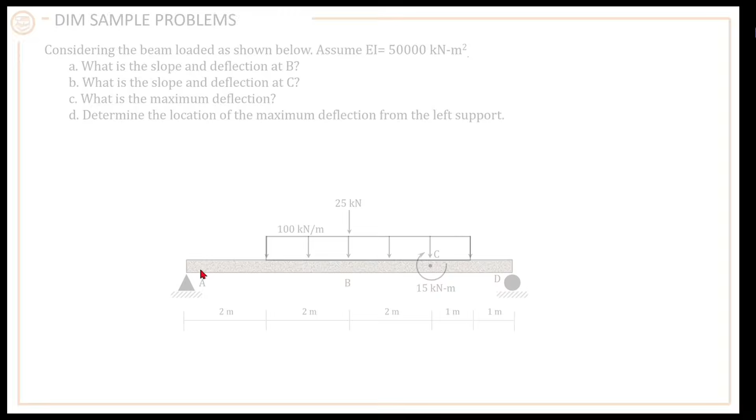Okay, so how do we solve this? Obviously, the first thing to do is we solve the reactions at the supports. Let's take a moment at point D to calculate the reaction at A.

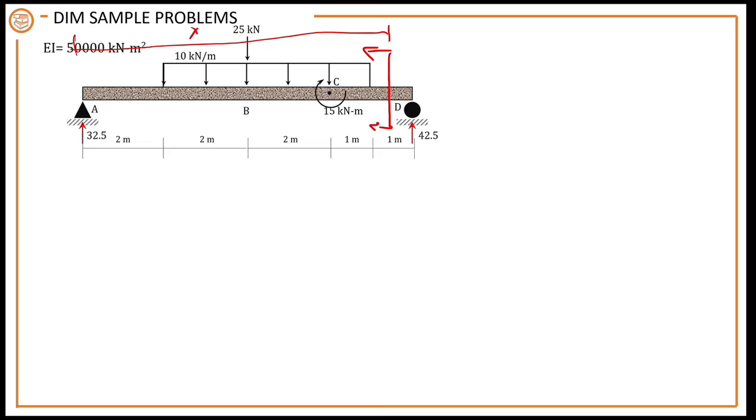However, in our theory of structures, our technique is different: we will create a single moment function, moment functions that will represent every segment. We have 5 segments here. How do you know you have 5 segments? Every time your load changes. So this is the first segment, second segment, before the load changes there's a concentrated load, then continuous load, then it changes again because of a concentrated moment, then changes again because of a cut, and then this is our last segment. So instead of having these 5 segments, we will just have one cutting section where we create the moment function, moment at that cutting section, and that cutting section is actually moving at a distance x from left to right, which will represent the moment function for all of the segments.

Ang 5 segment na nagbabago-bago yung moment diagram. Now, the problem here is your cutting section should act on the last segment and should also cut the uniform load. However, yung uniform load natin hanggang dito lang. So, what are we going to do is to extend this uniform load para masama siya sa cutting section. You always extend this up to your final segment.

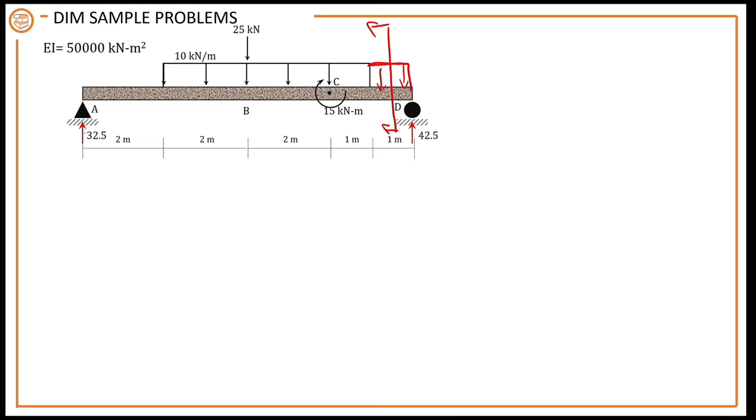Sir, paano yan? E di nagbago na yung ating reaction dahil nagdagdag ka ng load, magbabago yan, di ba? Pag nagdagdag ka ng load, ginagawa lang yan class sa mga varying loads. Let's say you have the triangular load, putol siya, so i-extend mo lang siya. Ganyan. Lalagyan natin siya ng extension lagi. Okay, katulad nito, uniform load, extend mo siya dito. Pero hindi na magiging pantay yung ating loadings, kasi nagdagdag ka eh. Hindi na siya same sa previous loading.

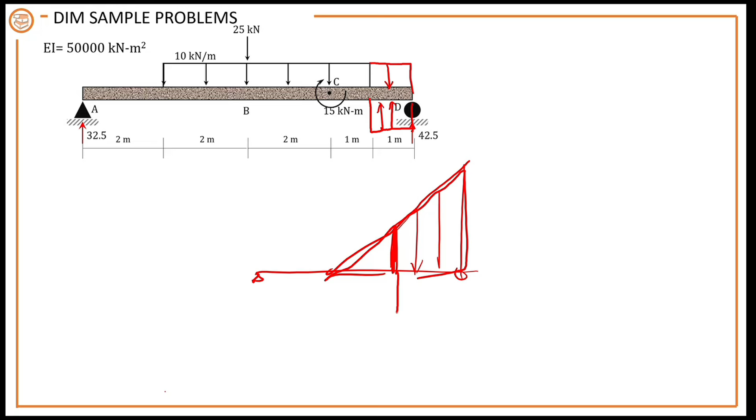So, ang gagawin mo is just to negate it by an upward uniform load. Kung triangular yan, kung ito yung dinagdag mo, magdagdag ka ng trapezoid dito. Just negate. Kung ano yung value neto, yun din yung magiging value neto, pero upward lang. Okay, so yun yung mangyayari dito, class.

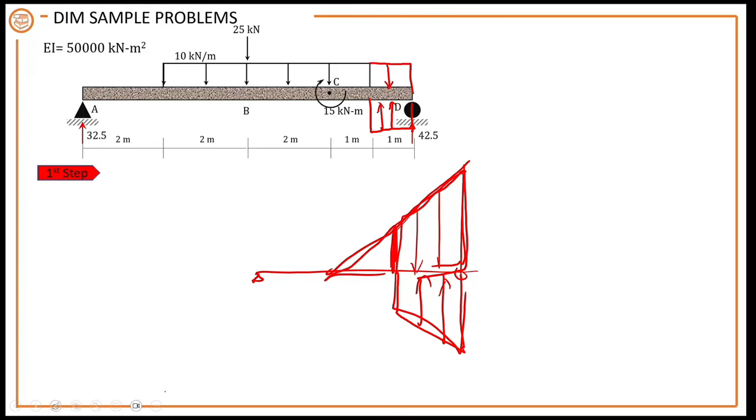So, bago ka mag-create ng moment function, for the cutting section, mula dito, a distance x yung ipoprovide natin, but you have to extend your uniform load. Meron ka ring upward dyan, para itong ating cutting section will represent any part ng cutting section. Pero wala na dito, wala nang uniform load yan, okay, dito lang sa dulo.

Okay, so dito tayo magmo-moment sa cutting section na yan, to establish the moment function, moment as a function of x. So, moment natin isa-isa yung mga loads natin. This is a distance x from the left support. Okay, so clockwise is positive yung ating gagamitin na sign convention for taking moment.

So, 32.5 times, again, that is a distance x, kasi this cutting section is moving. Nilagay lang muna natin siya sa dulo, pero moving yan, yung cutting section na yan. Okay, times distance x. And then, minus the uniform load. So, the uniform load, hanggang dito lang uniform load na yung moment natin.

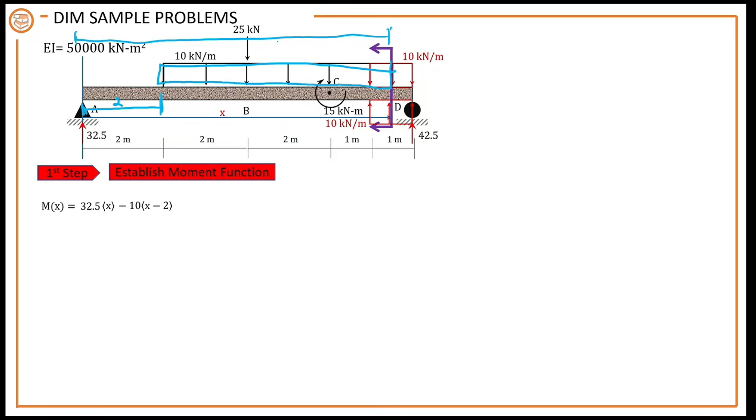Okay, ano ba ang distance ng uniform load na yan? Ano ba yung length niya? Kasi we need to get the resultant niyan. If this is x, bawasan mo lang ng length na to, that is 2 meters. So, taking moment, counterclockwise yan, papunta sa cutting section. So, that is 10 times x minus 2, kasi this is x, then bawasan mo ng 2, kaya ang length niya, x minus 2.

Resultant pa lang yan, class. We also need the distance. Okay, so ang distance niya, yan, punta sa cutting section, that is x minus 2 over 2.

Okay, so next, we now have the concentrated load, yung downward concentrated load. Ito pa, 25, counterclockwise papunta dito, so negative din yan, negative 25. How about its distance from the cutting section? Ano distance niya? This is x, bawasan mo lang ng 4.

X minus 4. Then we have the concentrated moment, so that is clockwise, plus 15 kilonewton meters. Pero, pag naglalagay tayo ng moment, alam natin na wala namang distance yan because that is already a moment. However, for this moment function, lalagyan natin siya ng distance. Ano distance niya papunta dito sa cutting section? This is x minus 6 meters, pero naka-raise to 0, para 0 lang din ito, class.

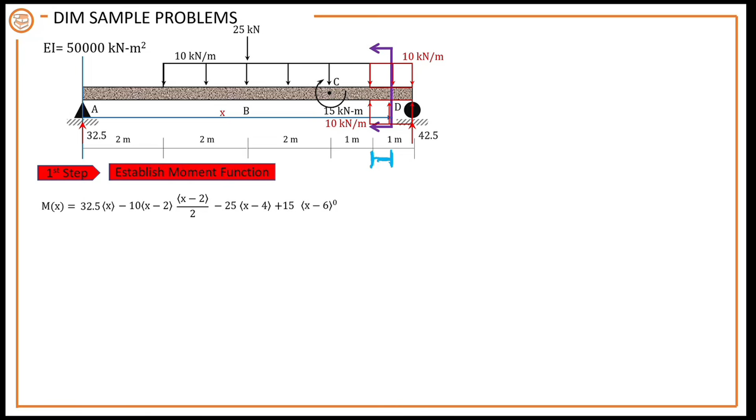So, clockwise moment. And then finally, do not forget ito, baka makalimutan nyo to, guys. Nagdagdag tayo dito ng upward, which will cause clockwise moment. At ang distance nyo lang, ano distance lang nito? Yung length ng load na yan. So, x minus, madali lang naman maghanap ng distance, ima-minus mo lang yung nadaanan niyang distance lagi. So, the distance is x minus 7.

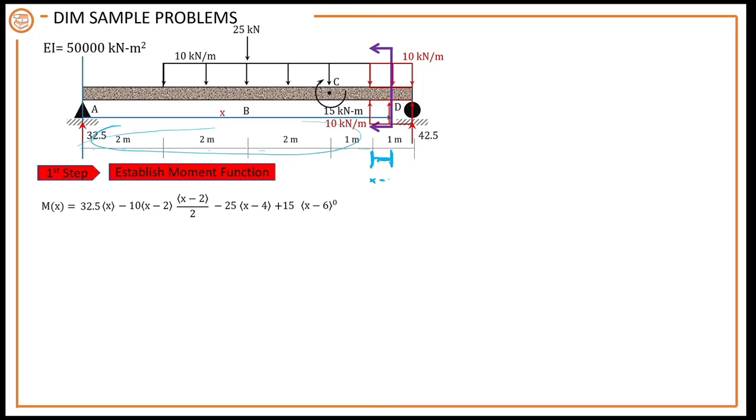Okay, so clockwise, uniform load, clockwise, kaya positive. Uniform load, resultant pa lang yan, and then the distance is x minus 7 over 2. Okay, simplify lang natin, class.

This is now your moment functions. So, ito na yung magre-represent ng moment at any section of your beam. Okay, halimbawa, you want to get the moment at this cutting section, moment at distance.

Find the moment. Determine the moment at a distance of 1 meter. Okay, you'll just use this equation. Moment at the distance 1 meter. Substitute the 1 here. So, let's simplify first.

Boundary conditions, guys. This was already discussed previously, mentioned as well. That's the boundary conditions, the slope and deflection at a given support.

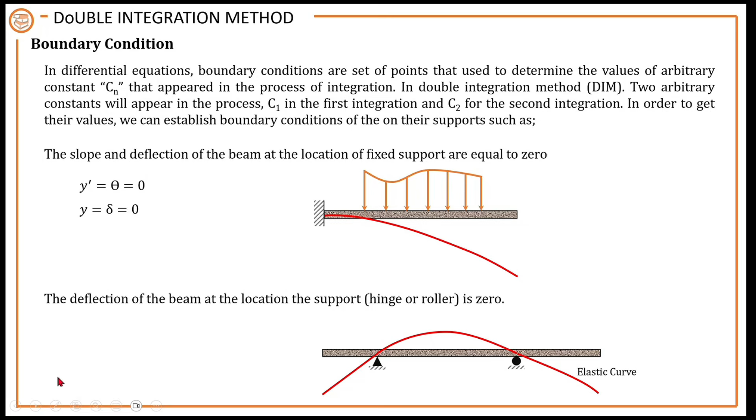For a fixed support, there is no deflection and no slope, both are zero. For rollers and hinges, there is no deflection, but there is slope, because the curve has a slope there, so the slope is not zero there. Okay, so that will be the boundary condition.

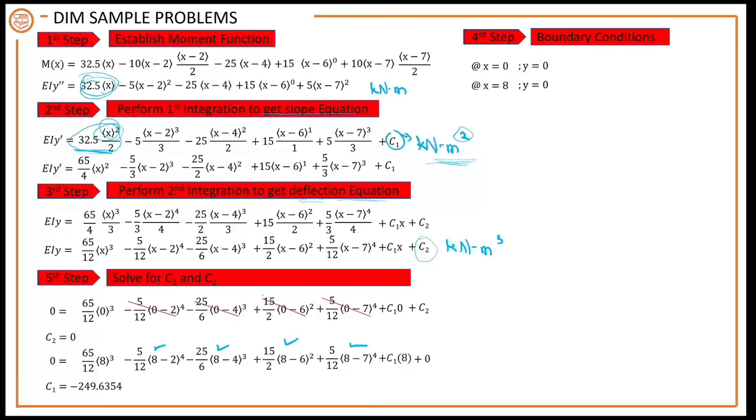Okay, we already have C1 and C2. Now we can put these into our slope equation and deflection equation.

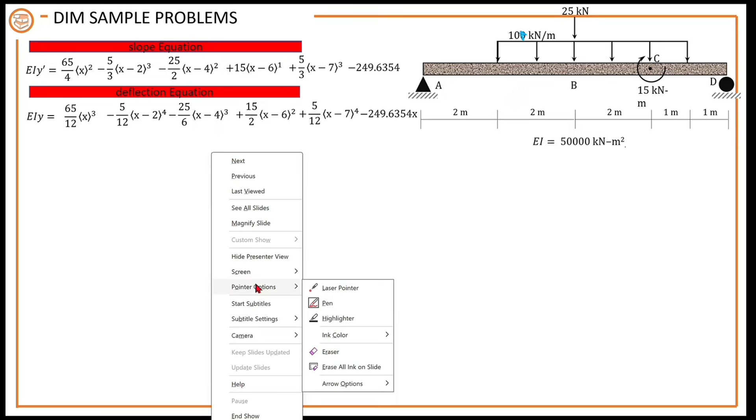Now, let's solve for letter A - we're looking for the slope at B, written as theta B or y prime B, and the deflection at B, which can be denoted as delta, lowercase delta, or y sub B. So B is at x equal to 4, right?

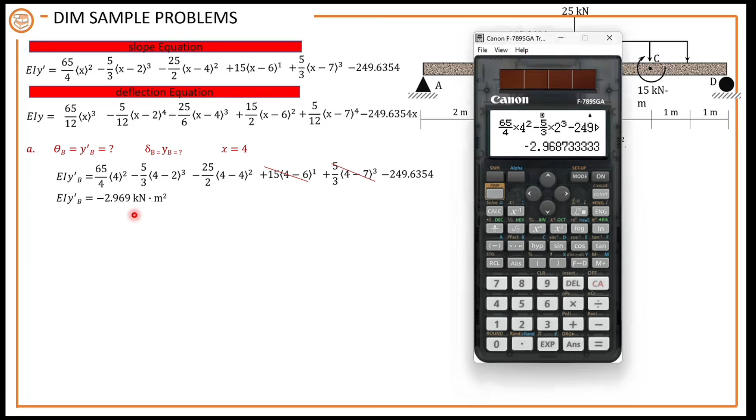Pero kasi, okay, may value tayo ng EI. EI natin is equal to 50,000 kilonewton square meter. Okay. Given yung EI. E is modulus of elasticity.

I is moment of inertia. Nung material natin, itong concrete beam, let's say this is a beam, kung ano man siyang materialis, kukunin mo yung modulus of elasticity niya, saan ba siya gawa? Pag steel, di ba, 200 gigapascal. Yung moment of inertia niya, ano ba cross-section niya? Solve the moment of inertia.

Okay, so, now, EIY prime B yan, kaya may EI pa. So, para eliminate yung unit nito, so divide natin by value ng EI. Ang unit ng EI is also kilonewton square meter. Bakit naging kilonewton square meter ang unit ng EI?

E, modulus of elasticity, gigapascal. Gawin na lang nating kilopascal, kilonewton per square meter. Unit ng E. Unit ng I, millimeter raised to 4. Gawin nating meter raised to 4. Diba? Cancel. Ano matitira? Squared. Diba? So, kilonewton square meter ang unit ng EI or flexural rigidity.

The higher the value of EI, the stronger the material is. No? Okay. Kaya maganda pinapataas lagi yung modulus of elasticity at yung kanyang moment of inertia. Pag malaki kasi yung value nitong EI, lumiliit yung slope. Ibig sabihin ng slope yung rotation, no? Paano siya nagro-rotate? Mas maliit yung rotation, mas maliit, mas maganda, no?

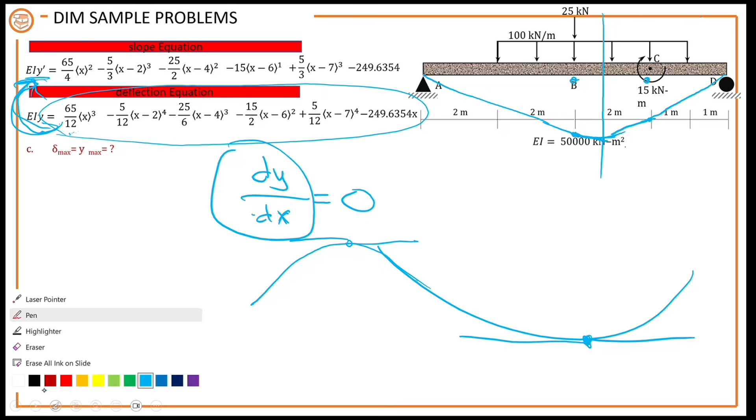Maxima minima sa differential calculus. Pag pinuha mo yung first derivative, babalik ka lang dito. Yung first derivative niya, ito yun. Balik ka dito, first derivative niya.

At kunin mo yung 0 na slope. At slope is equal to 0, makikita yung value ng x ng ating maximum deflection. So at maximum deflection, your y prime must be equal to 0. Your slope must be equal to 0.

Okay, so gawin natin, punta tayo dito sa slope equation. Okay, so 0 natin yung slope. And then, solve natin yung value ng x.

Now, question: can we use all the terms nitong slope equation? Gagamitin ba natin lahat ng terms? When solving the value of x, dapat ba natin gamitin lahat ng terms na ito? Hindi po, hindi natin pwedeng gamitin lahat ng terms, unless dito mo sinusolve yung maximum deflection.

You are expecting na nandito yung maximum deflection. Saan natin ina-expect mag-a-appear yung maximum deflection? Dito. So dapat yung x natin is greater than 4 but less than 6. Hindi siya pwedeng lumampas ng 6, o hindi siya lalampas dito sa point C. So ano yung mga pwedeng gamitin natin kung yung x natin ay hindi lalampas ng 6?

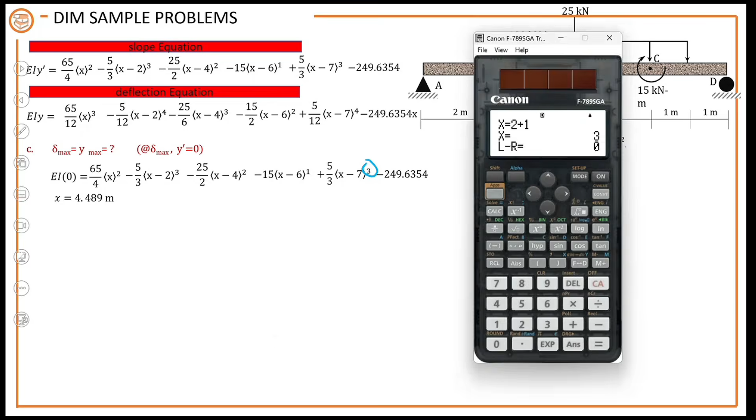Diba tatanungin ka lagi, what is the value of x? Ano ina-expect mo na value ng x? So syempre, para hindi mahirapan si calculator, ilapit mo lagi sa ina-expect mo na answer, para mabilis siya mag-calculate. So katulad dito, ano ba yung ina-expect mo na answer? Kasi possible maglabas yan ng negative na answer, sobrang laking answer.

So ilagay mo lang yung within the length of your beam. Within the length of the beam ang lalagay lang. Dito, dahil kinuha mo lahat yung terms, lahat ng terms ginamit mo, it will give you an incorrect answer. Okay, so ang gawin mo, i-resolve mo yung value ng x gamit ng tamang equation. Ang ginamit na lang natin, tinanggal natin to, tanggal din natin to, ito na lang.

Nagbabago-bago yung cross-section niya sa buong entire span ng ating beam. So for non-prismatic beam, how do we solve that? Since the elastic beam theory is derived with an assumption that the beam is homogeneous, or pare-parehas yung kanyang cross-section on the entire length, tawag natin prismatic.

Constant yung EI, and a beam with non-prismatic section must be cut at the point where the flexural rigidity changes. So kung saan nagbabago yung cross-section niya, kasi cross-section will affect the I, moment of inertia.

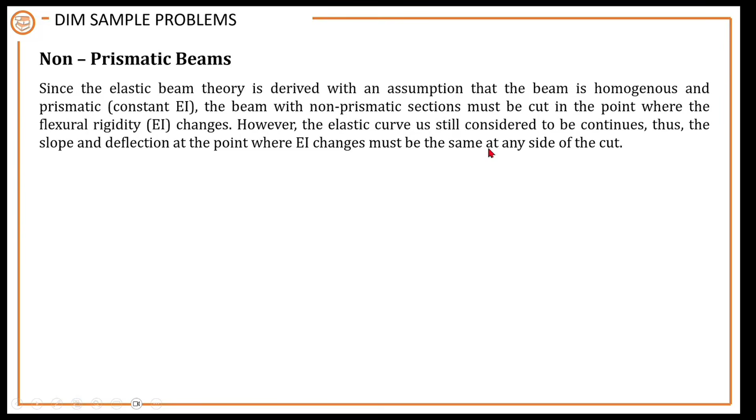Dapat ikakat natin yung beam doon kung saan magbabago yung moment of inertia. However, the elastic curve is still considered to be continuous. Thus, the slope and deflection at that point where EI changes must be the same at any side of the cut. Halimbawa, may EI1, kasi mas malaki yung cross-section dito, ito yung ating flexural rigidity 2. So, continuous pa rin yung elastic curve niya.

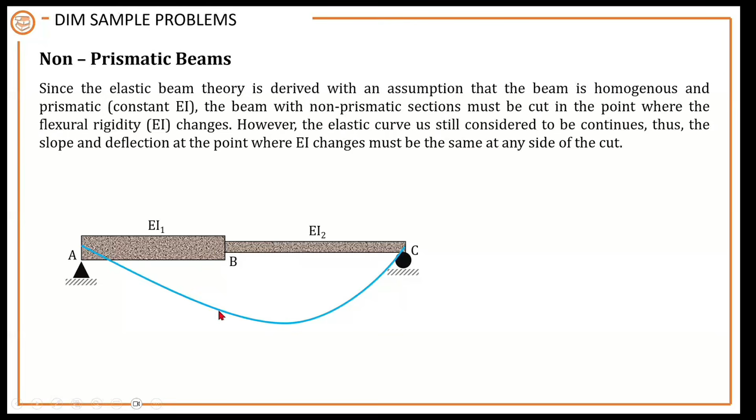However, pag gagawa tayo ng dalawa nang gagawin natin na moment function, isa para dito sa cutting section na to, at isa para sa ikakat natin na B to C. Dalawa yung moment function, dalawa yung slope equation, dalawa din yung ating deflection equation. However, at point B, parehas lang dapat kung ano yung deflection ng segment A to B, sa point B, same din ang deflection segment B to C.

So, ayan ang consider natin, theta B at YB. So, magkakaroon tayo ng additional na steps. Kanina, ito lang yung steps natin. Okay, ano-ano yung mga steps natin? So, number 1,

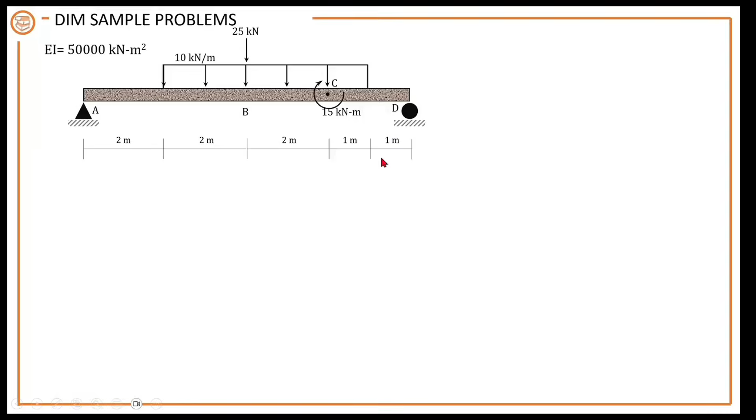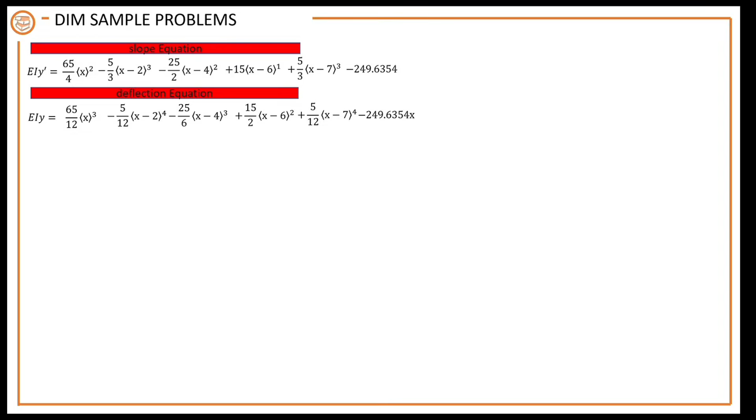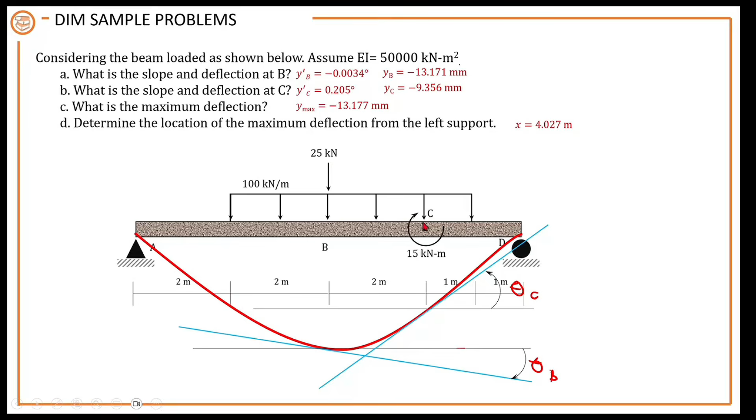However, for non-prismatic beam, magkakaroon tayo ng additional na step. Okay? So, ano yung additional step na yun? Ang additional step natin is actually the continuity equation.

For continuity equation, yung slope at B ng segment AB, kasi nga dalawa yung gagawin nating slope function, ay also equal to the slope at B for the slope function ng BC. Aside from that, yung deflection at B gamit ng equation ng AB is also equal to the deflection at B gamit ng equation ng BC. Kasi magkaiba nga yung equation ng AB tsaka BC. If we have

So, first thing to do is to solve the reaction sa supports. Hindi naman nakaka-affect yung EI, yung flexural rigidity, sa pag-solve ng reaction sa supports. So hindi siya magbabago, guys. Yan pa rin yung magiging reactions natin. Kung paano tayo nagsosolve ng reaction ng homogeneous or prismatic beam, same pa rin ang ginagawa natin dito. Let's solve the reaction.

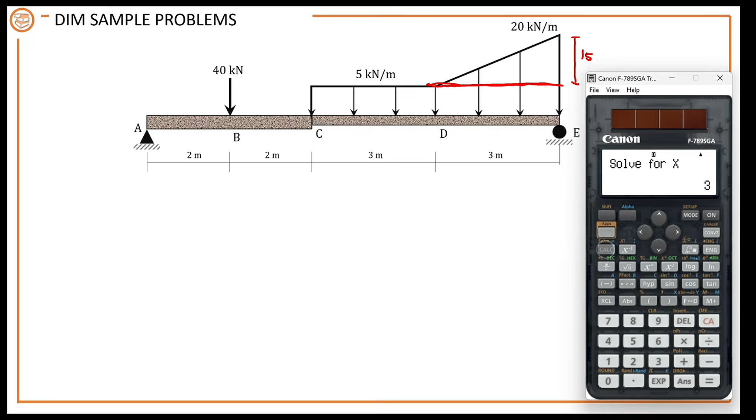Equals 0. I'm solving the reaction at A. Yan kaya yun, 100 siguro, 43.25, di ba? Tapos para makuha mo naman yung reaction at E, moment ka sa A. So, 49.25 makukuha mo dyan, guys. So, paki-check na lang if that is correct. Anyway, correct naman yan. Then, pag nag-moment ka sa A, kuha mo yung reaction at E. Then, to check if that is correct, sum forces vertical.

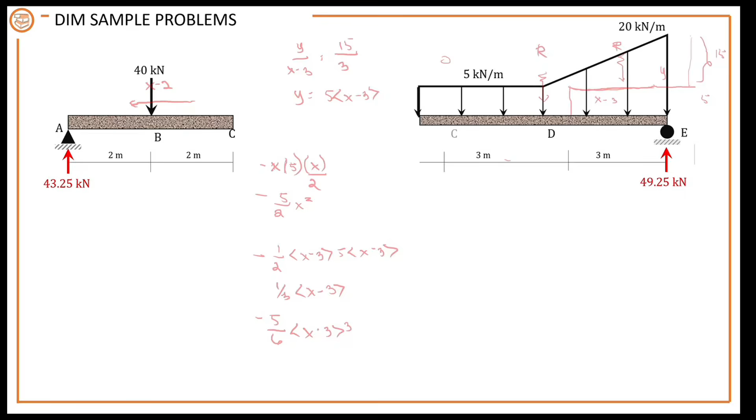Okay, now you have to isolate this or cut this section. Ika-cut natin yan into 2 segments. Cut na agad natin yan immediately. However, this is a continuous beam. Ibig sabihin, pagka kinat mo to guys, dapat may lalabas dyan na internal forces. Mayroon dyan internal moment, may internal shear. Okay, so now, let's solve.

Those internal forces, kasi kailangan natin yan later. So, kinat natin eh. Summing forces vertical, may shear na lalabas dito guys. Ito muna tayo, may shear na lalabas dyan, but we don't know the direction. Pero this is very obvious kung ano magiging direction niya, considering this left segment. Very obvious kung ano magiging direction niya, kasi mayroon kang upward na 43.25.

By summing forces vertical, kulang si 40. So ilan yung kulang mo dyan? 3.25. Dapat equilibrium kasi yan pagkakinat mo.

Kasi continuous yan, may internal force yan dyan. Aside from that, may moment din. Actually, may axial pa nalalabas dyan, pero hindi na natin siya kailangan, yung axial force. Kailangan lang natin dito yung mga shear force tsaka moment. Aside from that, we also have a bending moment.

So paano ko nalaman na ganito yung direction dyan? Let's say mag-moment ka sa point na to. Summing moment at A is equal to 0. Clockwise is positive, diba? 40 clockwise, 3.25 clockwise din. So ano ko kontra sa kanya? Moment dito, counterclockwise. Kaya nalaman ko na counterclockwise yung direction ng moment na yan.

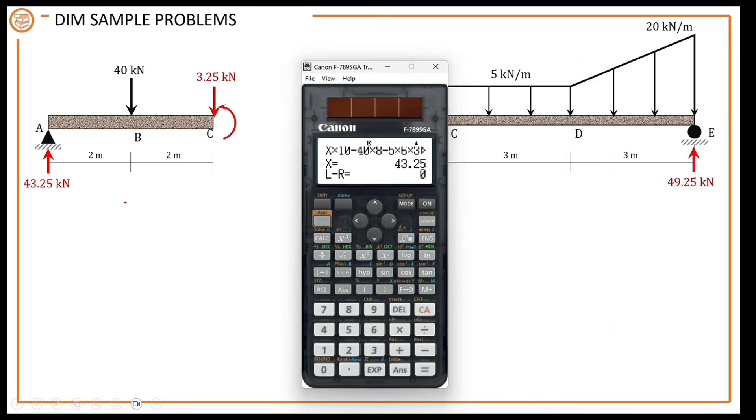So anong value niyan? Okay, let's solve yung magiging value ng moment na yan. So 40 times 2 plus 3.25 times 4, minus, kontrahin na ito ng unknown moment na yan, equal to 0.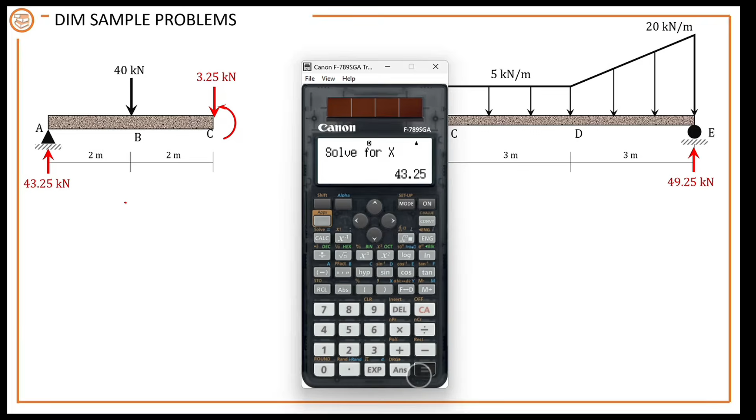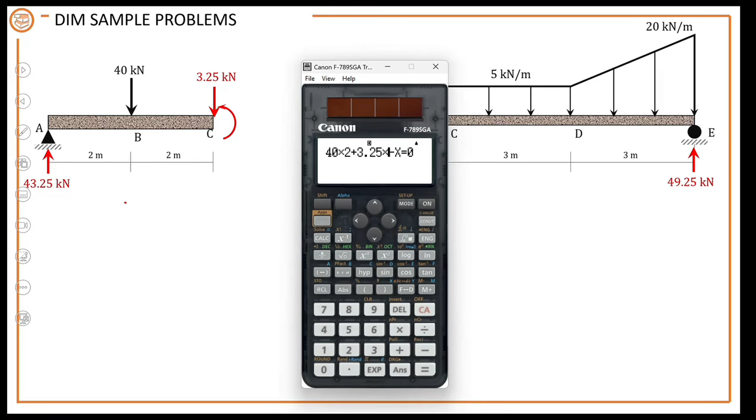Yan, 86.5. Oh, but 93? 40 times 2. 3.25 times 4 pala, sorry, times 4. Yan, so we have 93 kilonewton meters, 93 kilonewton.

So kung ano yung internal force dyan sa point na yan, dapat yun din yung internal force dito, but they have different direction. If this is counterclockwise, so if this is upward, this internal force here must be, if this is downward, the internal force on the other side must be upward. If this is counterclockwise, this should be a clockwise moment. Kasi para pag nagdikit sila, makakancel lang yung values na yan. So solve natin yung internal forces muna.

Bago tayo mag-proceed doon sa moment function, we're at moment function and the slope equation, then deflection equation. So ngayon, dito muna tayo sa segment na to. Okay, establish the moment function.

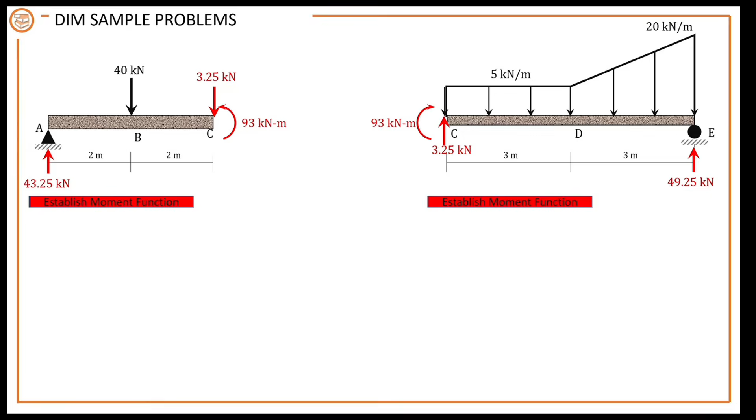So we have two segments here. Dalawang beses lang nagbago yung load, so we have AB and BC. Doon tayo mag-cut sa BC. Wala naman tayong uniform load dito na need i-extend, so sila-sila lang, sa cutting section na yan. So that should be a distance x.

Okay, let's create the moment function. So 43.25 times x, and then counterclockwise, negative 40 times, anong distance nito? So this is x minus 2. Okay, so okay na tayo sa moment function niya.

Dito naman tayo sa kabila. Sorry, dire-diretso natin, simplify. Take note class that the moment function is equal to EI y double prime, EI y double prime.

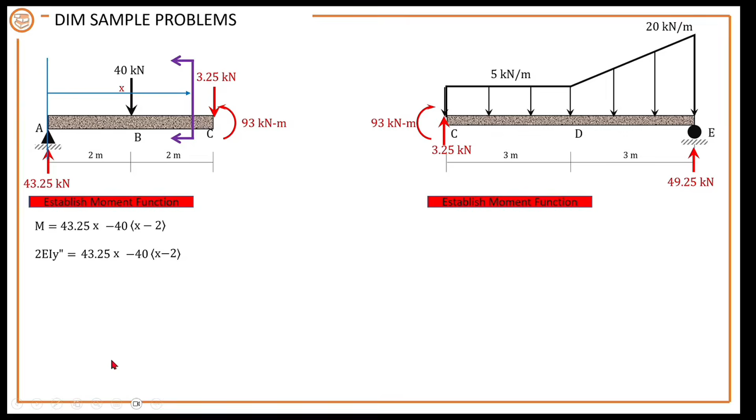So yung EI natin dito sa left equation natin is actually 2EI. Yung value ng EI niya nilalagay na natin, no? So diba, this is 2EI, ito EI yung kanyang flexural rigidity. Tignan natin yung value ng flexural rigidity niya. Saan na yun? Given to eh, given. Ayan, given nga siya, so your EI at AC is 2EI kasi mas malaki siya. So your CE naman is only EI.

Sinubstitute lang natin class yung value ng EI. Equal daw siya sa 2EI. So your moment function is equal to EI double prime and the value of EI is 2EI. Wala tayong specific value ng EI, no? Sabi lang, this is 2EI and this is EI. Pwede rin yan sabihin dyan, your value of EI here is 100,000

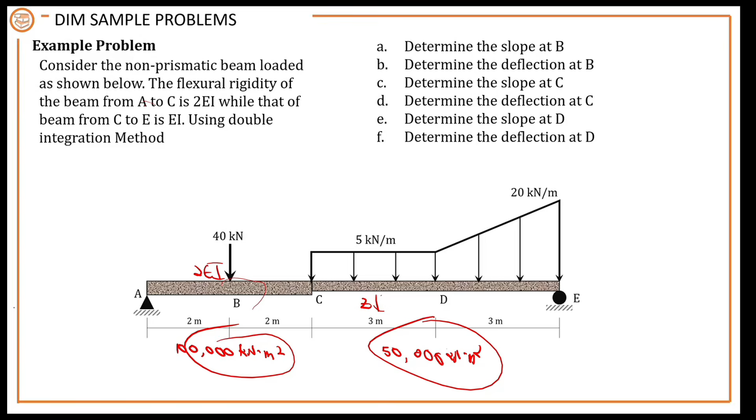kilonewton meter squared. Ito naman, 50,000 kilonewton meter squared. Pwede ganyan. Pero hindi tayo binigyan ng exact value, no? Binigyan lang tayo ng factor. This one is 2EI, 2EI daw ito, ito EI. So walang exact value, unlike sa previous problem, may exact value na binanggit.

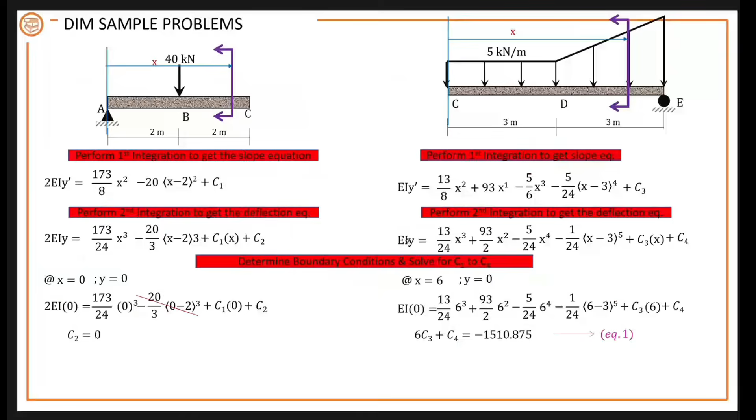Yan, meron na tayong okay. Dito naman tayo sa kabila. Okay, so ito na yung magiging start natin ng x. So for the right segment natin, dito na yung reference ng x natin, x distance. And this will be our cutting section, the part na to. And this will be our distance x.

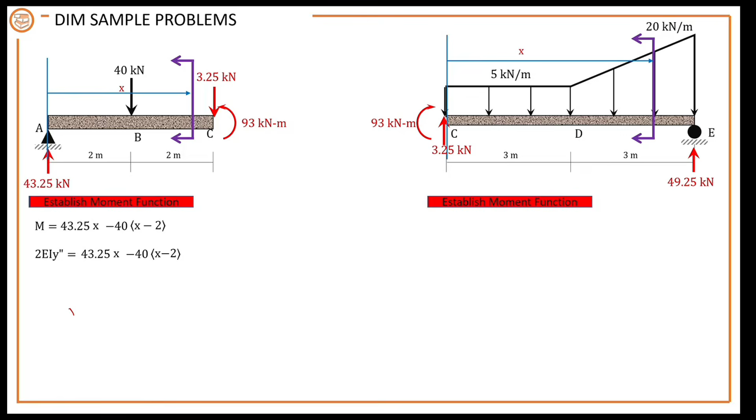Fortunately, yung ating, kasi hatiin natin to sa uniform load eh. Yung uniform load naman natin, tinamaan, dire-diretso siya. And we have the triangular load, tinamaan naman ng cutting section. If not, you have to extend it. You have to extend those cutting sections, those load, no? I-extend mo yung load.

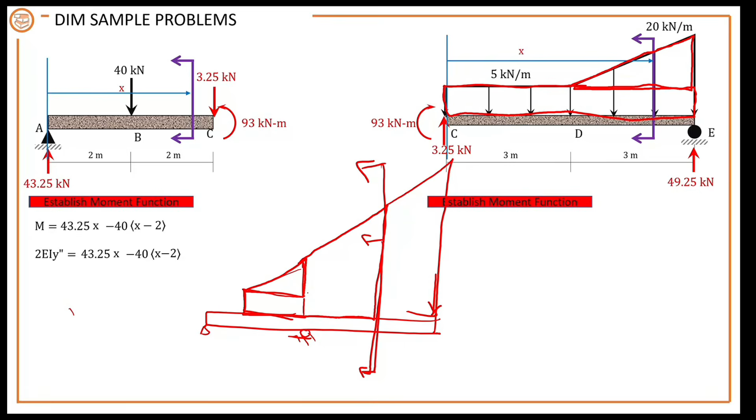Yan. You have to extend this load hanggang dito. Ito yung cutting section mo. Okay, dapat tatamaan yung triangular. So, yan na, tinamaan na.

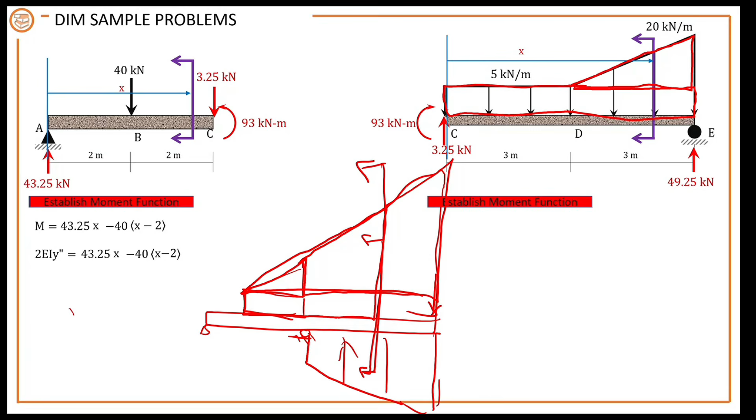Triangular load, then uniform load. Then kung nag-extend ka dyan, meron din sa baba, pero upward load naman siya. Right, so that is...

Applicable kung ang loads ay putol, hindi siya hanggang doon sa dulong segment. Fortunately, dito naman hanggang dulo. We have two segments here. The first segment is just uniform load. Then ang isa namang segment, dyan na nag-start yung triangular load.

Okay, so for the moment function, let's establish the moment function. Magmo-moment tayo dito sa cutting section. Consider natin na to, kasi may moment na siya dito. Dito, hindi natin siya nakita sa segment na to.

Yung mga load na to, kasi hanggang dito lang tayo sa cutting section. Hindi tayo sumagad doon, okay, just before the end of your beam. Yun yung cutting section mo. Ito kasama na to sa pag-establish ng moment function.

Unahin na muna natin si concentrated load, 3.25 distance x. And then a concentrated moment, clockwise is positive moment. But do not forget to include the distance, that is a distance x. However, it is just raised to 0.

Then the uniform distributed load, 5 times x. 5 times x over 2. 5 times x, that is the resultant, times x over 2 is the distance of the resultant of the load. So, kaya naging ganito yan.

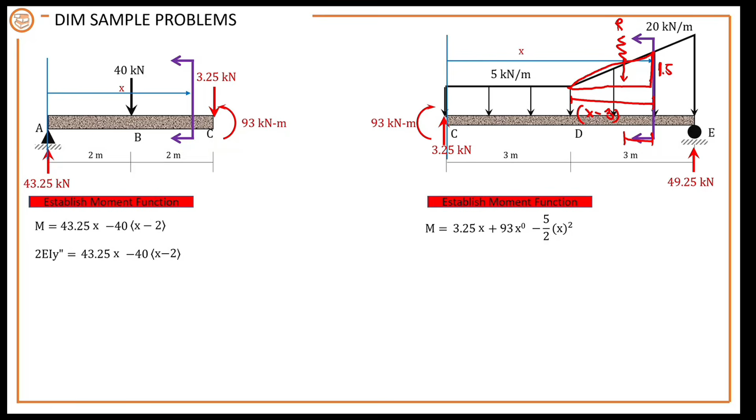So resultant, ang length nito, class, is x minus 3, di ba? X minus 3. So resultant muna para hindi mahirap. 1/2 base natin, x minus 3. Height is 15. Resultant distance, 1/3 ng x minus 3. 1/3 of x minus 3.

Ayan, so wait, di pala 15 yung height niyan, sorry. Sa cutting section na to, hindi, ito yung 15. Pero ito, yung sa cutting section na yan, class, nagva-vary kasi yan eh. Kung nandito yung cutting section mo, iba yung value niya pag nandito. Kasi movable yung distance x natin, okay?

So hindi pala yan 15 yung height na yan, yung height natin is just y. Y distance. Y. Now, if this is your x, this is your x minus 3, di ba? X minus 3. So you have to solve the value of y in terms of x. By ratio and proportion, so we have y over x minus 3 is proportion siya sa 15 over 3.

Over 3, ratio and proportion lang tayo. So meaning, you have y is equal to 15 over 3 times x minus 3. Okay, yun na yung value ng y natin. Okay, now i-moment na natin yung resultant nito.

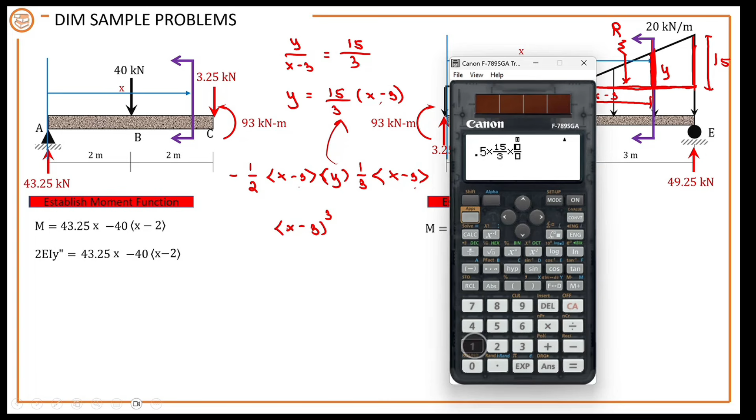Okay, then meron kang 15 over 3 times 1/2 times 1/3. So ilan yun? Okay, so 1/2 or 0.5 times 15 over 3 times 1/3. 1/3, so 5 over 6. 5 over 6, so meaning, meron ka ditong 5 over 6. Due to this triangular load, you have 5 over 6 times x minus 3 cube.

Again, yung y mo baka gawin mo siyang 15, yung height ng triangular load na to. Hindi, kasi gumagalaw-galaw tong cutting section mo na to. You should use ratio and proportion to get the height of this y. Okay, so yun, ito na yung moment function natin.

Apat lang naman na load yan. Isang concentrated load, isang concentrated moment, uniformly distributed load. Ito yun, rectangular load, okay, and then the triangular load.

So na-establish na natin yung ating moment function. And moment function natin is equal to EI y double prime, wherein yung value ng EI natin is still EI for this segment CE, unlike dito sa segment AB or A to C. So that is 2EI.

Okay, so ito lang yung nagkaiba, class, kapag meron tayong non-prismatic na beam, magkaiba yung kanilang moment function. Ihiwalay mo sila kasi magkaiba yung value ng EI nila. Because the double integration method was derived from prismatic beam lamang.

Okay, so at x is equal to 4, substitute natin dito sa slope kasi continuity equation, slope tayo. Slope at C, x is equal to 4. Substitute mo dito, 4, 4, 4. Wala pa tayong value ng C1.

Okay, so YC, slope at C. Nasolve natin yung slope at C. Slope at C is equal to, simplify mo lang to guys. Slope at C is 2, ang answer dito is 266 plus C1.

May meron ka ditong 2EI. Kailangan kasi YC lang ang nandito. Kasi equate natin yan dito sa other side. Okay, this is 266 ah. So magtaka kayo saan galing yung 266.

So that is 173 over 8 times 4 squared minus 20 times 4 minus 2, or 2 squared. So that is 266, so plus C1. So solve yung YC, Y prime C.

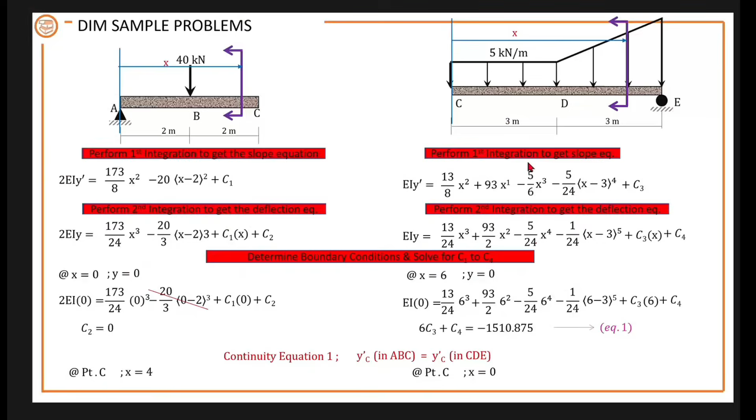Slope at C. Okay, next dito naman tayo sa kabila. So at point C, x is equal to 0. Sa right side kasi, point C ay nasa 0 ng x. So substitute lang natin.

Okay, so at point C, x is equal to 0, 0, 0, at hindi ka pwedeng magkaroon ng negative dito. So 0 na to, 0 na to, 0 na to, 0 na rin ito. So C3 is... over EI.

Hindi 0 to ha, yung YC. So C3 na lang natira dito. C3 na lang, meron kang EI. Baka i-0 mo, C3 is equal to 0 -- hindi, kasi i-equate natin tong dalawa. Kaya nga continuity equation, so i-equate natin silang dalawa.

Yan na. Kung ano kasi yung slope mo at CDE, equal lang din sa slope at ABC na slope equation. I-equate natin yung dalawa. Yan, so cancel yung EI. Cancel yung EI, may matitira na 2 dito.

Okay, solving for -- actually wala tayong masasolve pala dito, kasi magagawa lang natin is an equation. Okay, so di ba may over 2 yan dito. Ganito yung equation mo dyan eh.

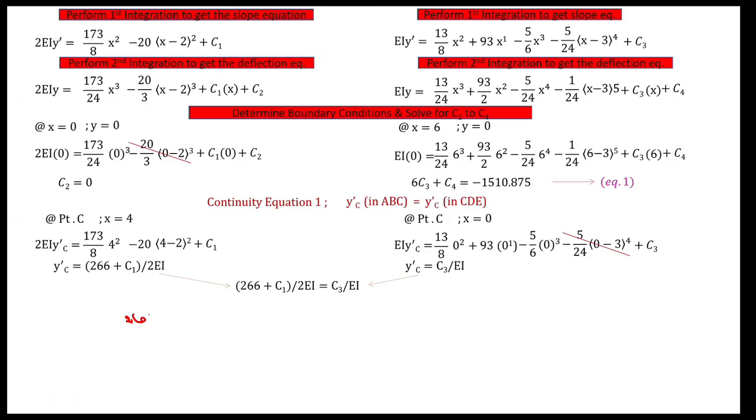266 plus C1, all over 2, cancel na yung EI, is equal to C3. So punta dito si 2. So meron kang 2C3, C1, 266 plus C1. O, lipat mo na lang dito si C3.

Lipat si constant sa kabila. So meron kang C1 minus 2C3 minus 266. So may dalawa kang unknown dito, C1 and C3. So, equation number 2.

Okay, so this is our first continuity equation. Dalawa lagi yung continuity dito, kasi same yung slope at saka deflection. Okay, so next natin na continuity equation is the equation, continuity equation number 2. Yung deflection at ABC is also equal to the deflection at CDE.

Okay, so deflection equation naman to. At point C, at point C to di ba? Nasaan nga yung point C? Sa left, okay. Di ba yung point C natin ay nasa distance 4 meters? Sa right naman, sa right na segment, yung point C natin at x of 0 meters.

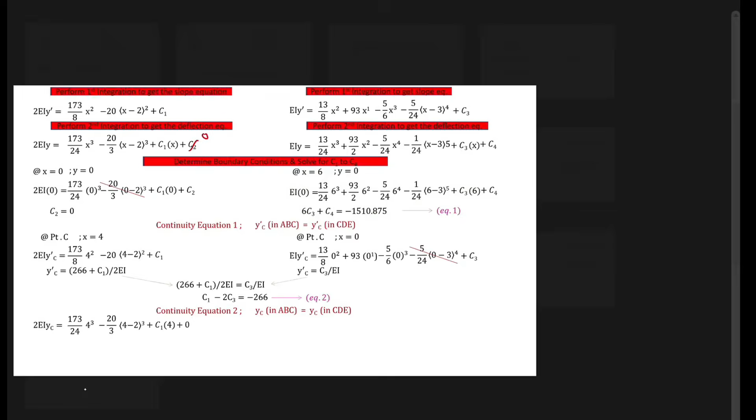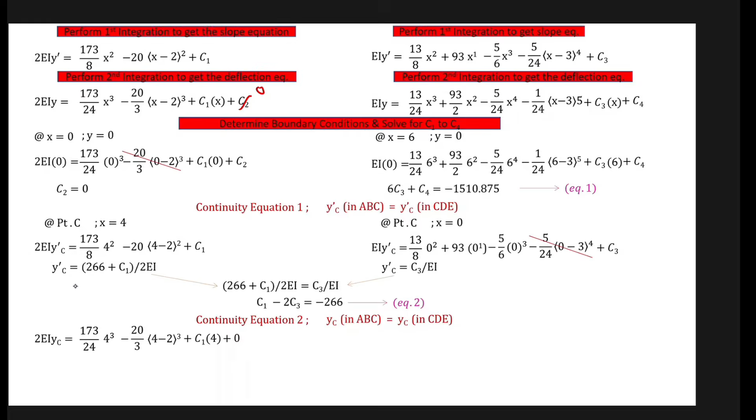Yan, gamit nung boundary condition, we were able to solve that C2 is equal to 0. So, ayan, using continuity equation number 2, deflection equal to deflection.

So cancel to, hindi pwede yan. Kasi, sorry, positive pala yan. So simplify lang natin to. Ayan, pag sinimplify mo yan, so we have 173 over...

173 over 24, 4 cube minus 20 over 3 times 4 minus 2 cube. Yan, 408, tama ba? Yan, 408 plus 4C1.

Meron ka ditong YC, ibaba mo lang C2. Okay, ayan na siya. Si YC, sunod mo, i-equate mo kasi yung YC sa kabila naman. Okay, you use the...

Deflection equation, Y, at point C. At point C here, X is equal to 0. 0, 0, 0, 0, cancel lahat. Tira na lang si C4. So EIY, cancel lahat yan eh.

Is equal to C4, C4. Pag-equate lang natin yung dalawang deflection, kasi equal lang sila. Okay, so ito siya.

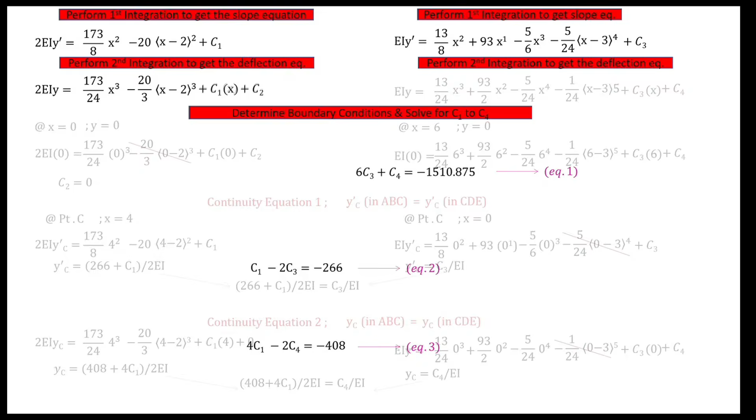You can now use your calculator. Three equations, three unknowns. Let's use the mode. Mode 5, 3 unknowns, that is 2. So, let's put C1 as A, C3 as B, C4 as C.

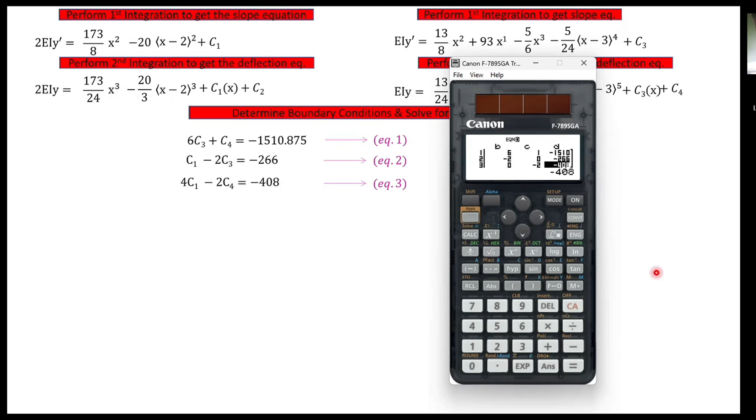Okay, so from this one, C1 was still unknown. So here it is now. From this one, C1 and C2 were still unknown. Let's go here. C3 is also unknown here.

And then, deflection equation of ABC. C2 and C1 are already known. From this, here it is now. C2 is 0, right? And then, CDE.

The double integration solution is really long. So we are asked to solve for the slope at B, deflection at B. This is easy now - since we're looking for B, we use segment ABC. So for slope at B, deflection at B, B is part of ABC. So we're at x is equal to 2.

So substitute x is equal to 2. So, 2, 2, that's 502. Slope at B is... you still have 2 there, because EI at segment ABC is 2EI. So the final answer is negative 208.038.

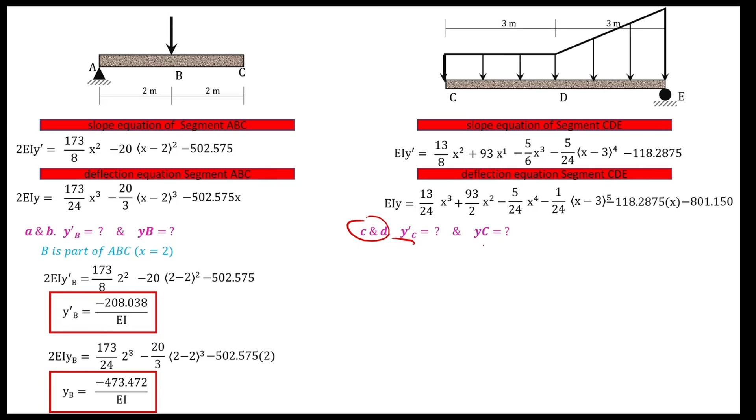For question C and D, what is the slope at C? What is the deflection at C? So here, C is part of ABC. Right? C is also part of CDE. So it's up to you which one you use, since point C is part of either equation. So if I were you, I'd just use x is equal to 0, which is in the second segment.

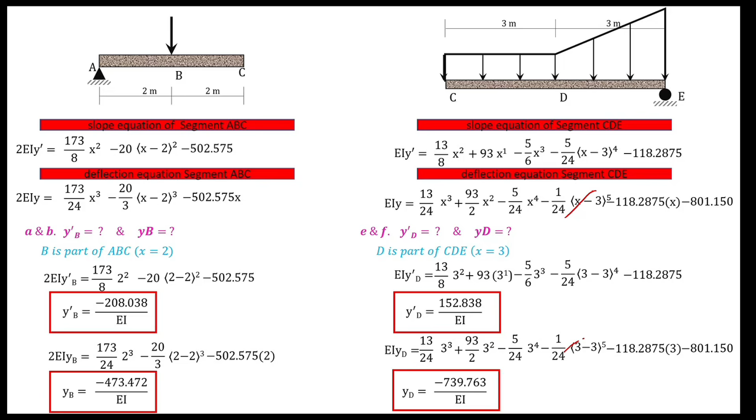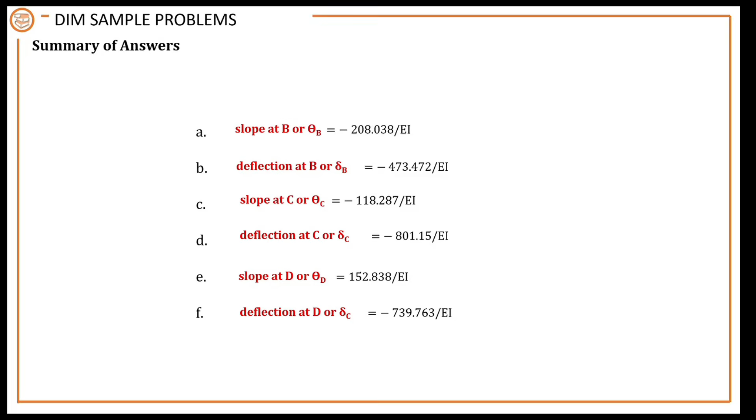Double integration method. Summary of answers. Okay, so that's how we use the double integration method in solving for the deflections and rotation.